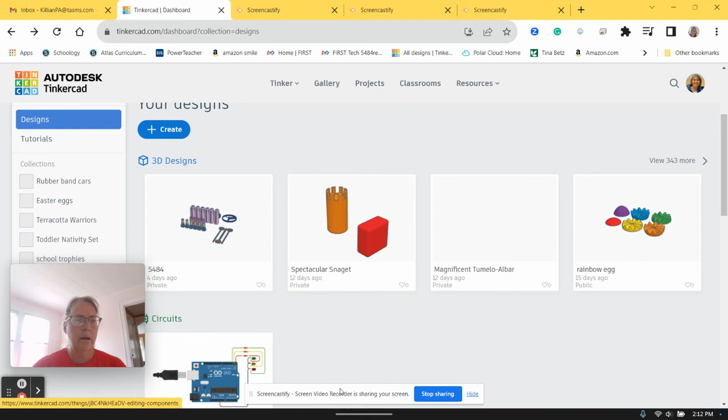Campers, we're going to work today to make a 3D pumpkin that you can then carve in Tinkercad.

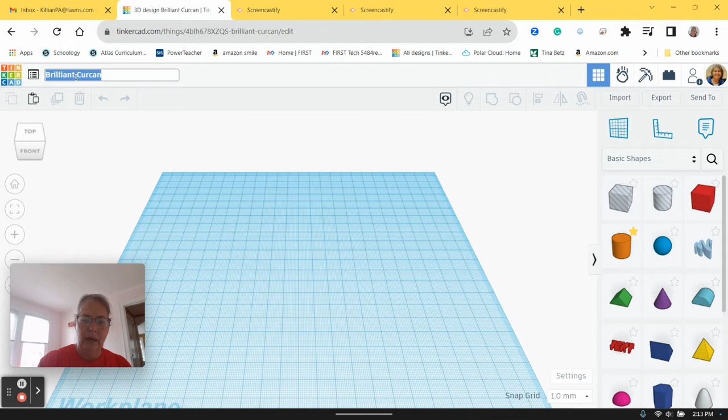So we're going to start by hitting create from your dashboard and a 3D design. This brings you to the work plane, which corresponds to the build plate of a 3D printer. Up in the corner, it's got some weird name that it just called itself. We're going to left click on that and then change the name to pumpkin, so I know what I'm dealing with here.

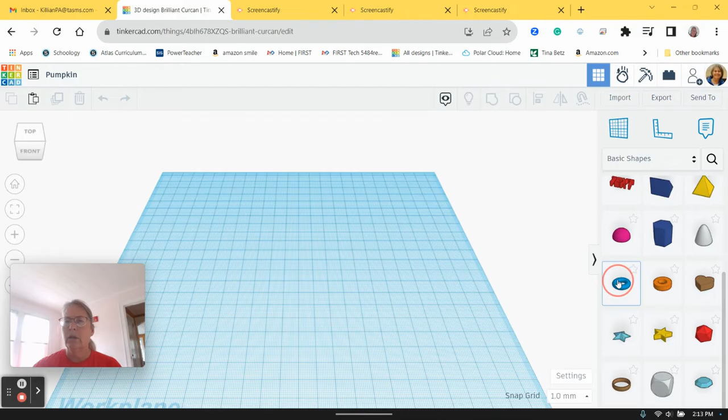All right, and then we're going to start putting shapes on our build plate. The first shape that we're going to pull in is our main shape. It's called a torus. In the basic shapes menu, you're going to scroll down until you see this blue one called a torus. You're going to left click and drag that onto your build plate.

Now, when you do that, it's going to give you some information about this torus. First of all, it says it's blue, solid. So we're going to click on that and change it to orange because of reasons related to it being a pumpkin.

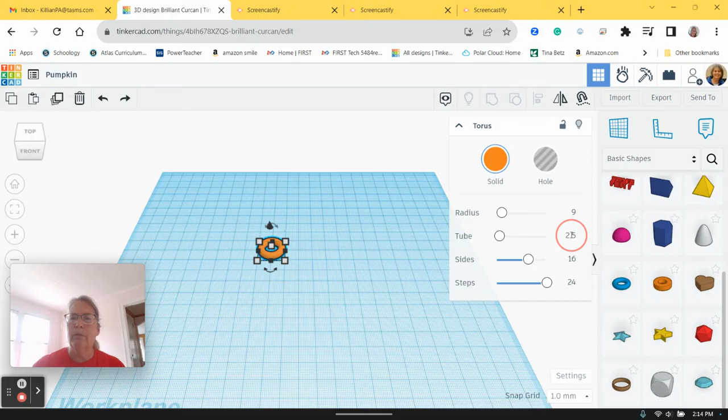And then we're going to change its size and shape a little bit. There's two ways to do this. One is to hit Shift and click on an edge and just drag it, that makes it larger, but I'm not really wanting to do it that way. I'm going to do it this way: I'm going to change this radius by clicking on this and changing this to, I'm going to make it 9. And then I'm going to change the tube to be 4.

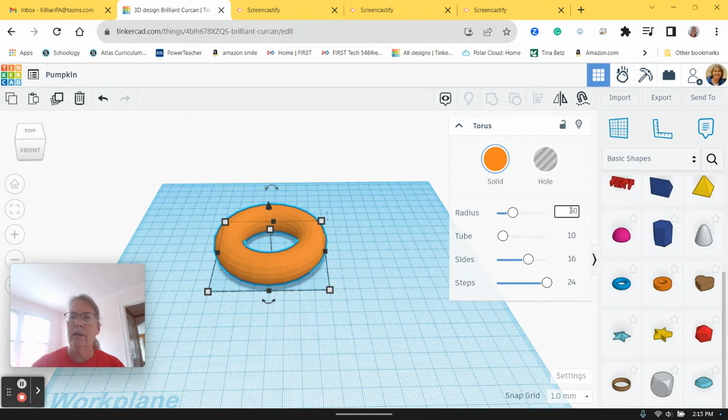Actually, I'm going to change this radius to be, I don't know, 30. And then I'm going to change this to be 10. That's about right. No, let's make it bigger. Let's make it 50 and 20. Oh, that's much better. That's a nice big, going to be a big fat pumpkin.

And then I'm going to change the sides. You'll notice that these things are kind of geometric, they've got like little ridges in it. I'm going to slide this over all the way to 24. That's going to make this shape a lot smoother.

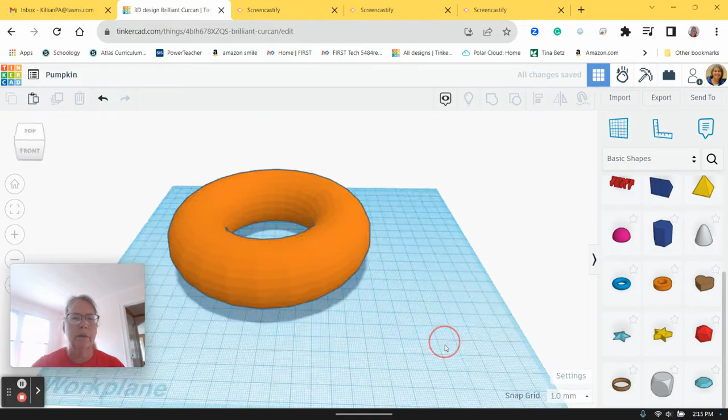Okay, now that I've got my first shape, doesn't look like a pumpkin yet, but trust me, it will. I want to left click somewhere on the build plate that's not on the torus and drag. Left click and drag, that's going to select that shape.

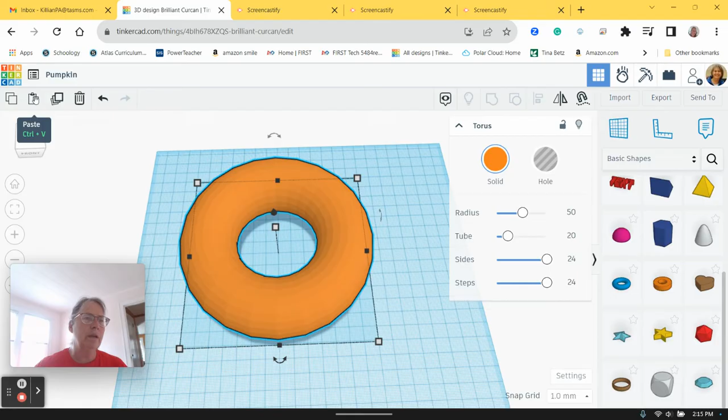Then I'm going to come up here to this copy button, hit copy, and then I'm going to hit paste. That's going to make another shape that's just like the one I just had, so that I have 2 of them.

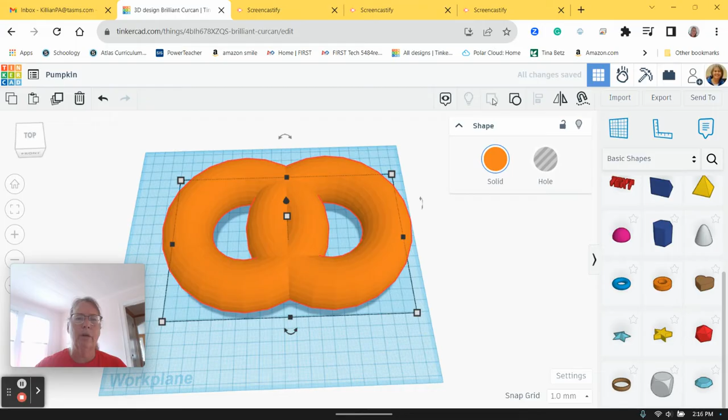Now I'm going to left click and drag so I select both shapes. And I'm going to come up here to this bar, which is called the group, and I'm going to hit that. Now what that did was put this shape as one piece. It moves as one now, it's like a solid glued together thing.

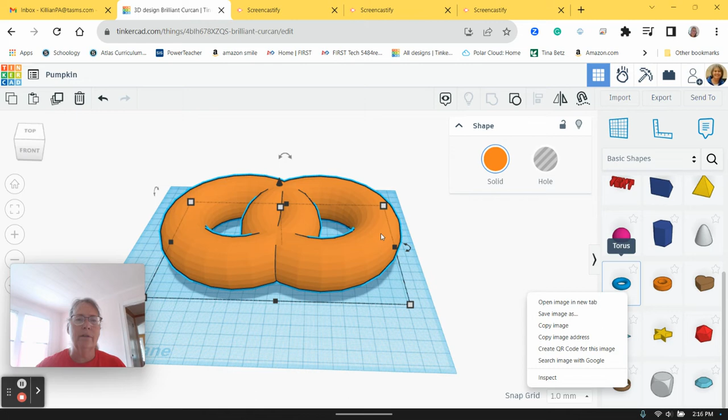Now, still doesn't look like a pumpkin, looks more like a pretzel. So now we're going to use these arrows. There are 3 arrows here, one that corresponds to left and right, side to side, and up and down. I'm going to go to this one here, and what I want to do is switch that 90 degrees.

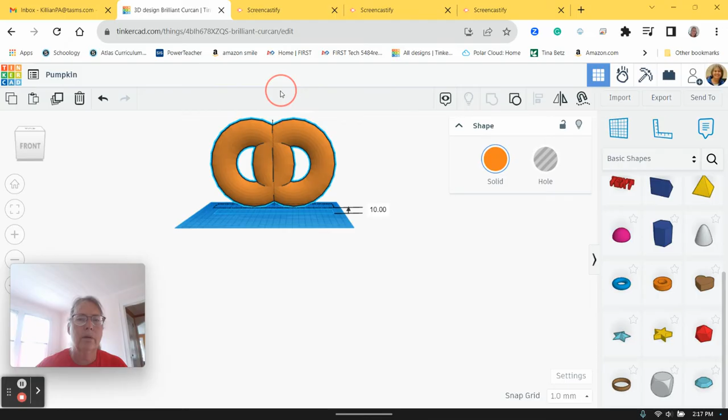Now you'll notice it's below the build plate, so I'm going to have to take this caret and move it up so that it's at 0. Well, here, I'll show you a different way to move it up. This says -18 right here. I can click on that and just hit 0. And now it just sits on the build plate.

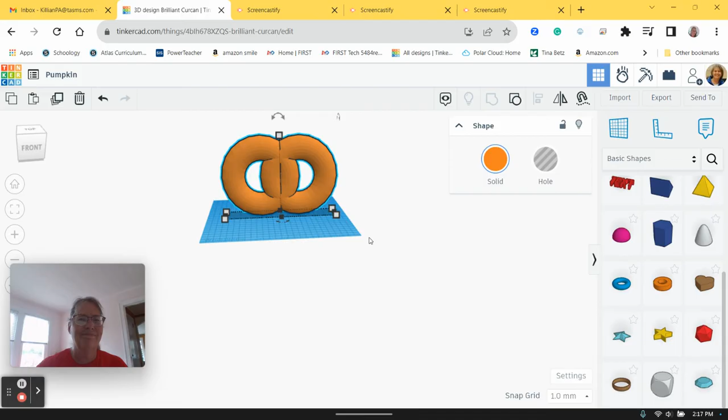Now it looks like a standing up pretzel. Still not what I really want, but I'm going to copy this whole thing now. Copy, and paste it. Now we're going to do something special.

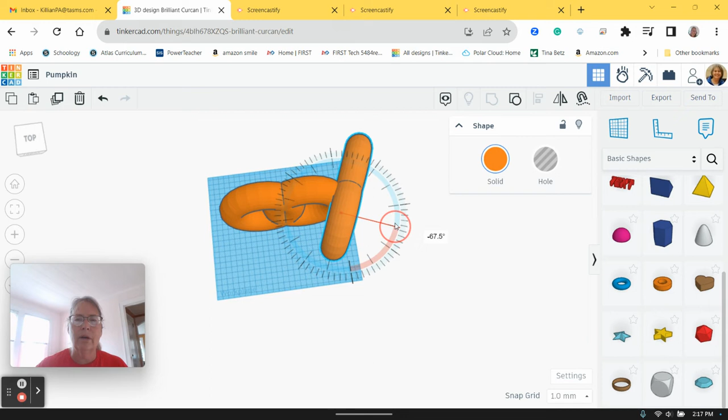Still using that arrow key, I'm going to turn this 45 degrees. You notice how I do that? I left click and hold, and it turns it. Actually, I'm going to turn it 90 degrees. Now it looks ridiculous, I don't know what it looks like.

But what we're going to do now is where the fun begins to happen. Select everything, left click and drag. Go back up here to this arrow or this taskbar and hit this one called align. We're going to align this in the middle. Notice the shape moving and align it to the middle there.

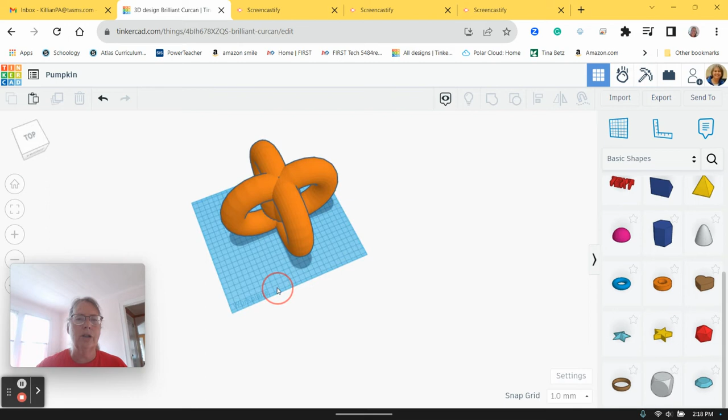Now it's starting to look like something, looks like a child's toy now, a baby's toy. Now we're going to select everything and glue that together. Once it's glued together, you're going to come up here and copy and paste.

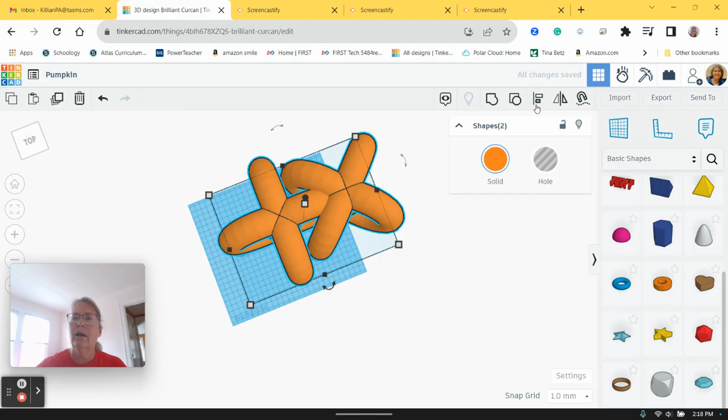Turn it 45 degrees. Align again. Now it's starting to look like a pumpkin.

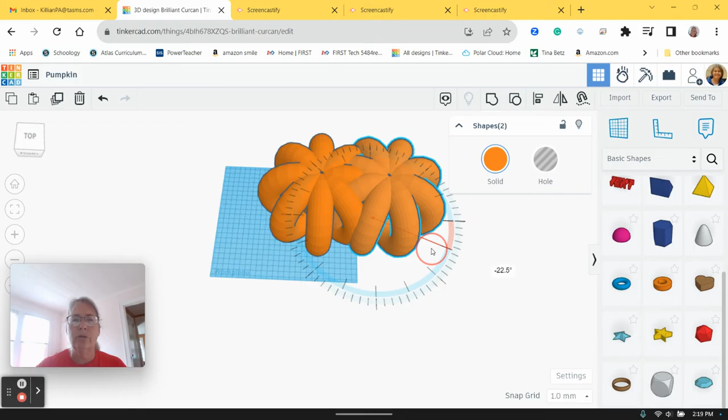Now I'm going to copy that whole shape and paste that whole shape. And I'm going to still turn it again, but now I'm only going to turn it like 22 degrees, 22 and a half degrees. Let's see how that works. We're going to align it.

Ooh, now it's starting to look like a pumpkin. We're going to glue that together.

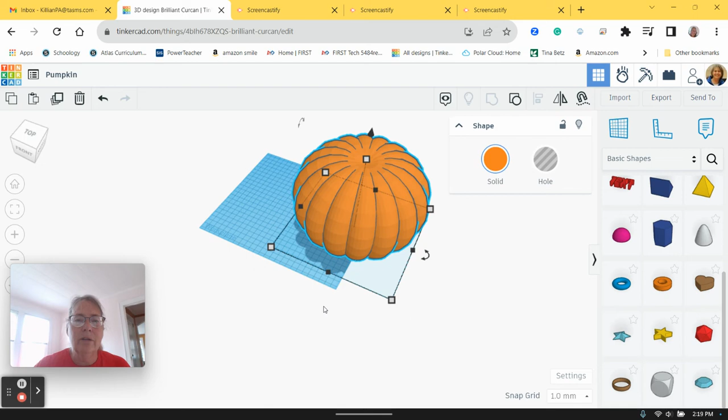Now at this point, if you look really close, if you've made your pumpkin big enough, it looks like a solid shape. But, hit this home again. But if I were to click on this shape and turn it into a hole, you'll see that in the middle, there's actually a hole in there.

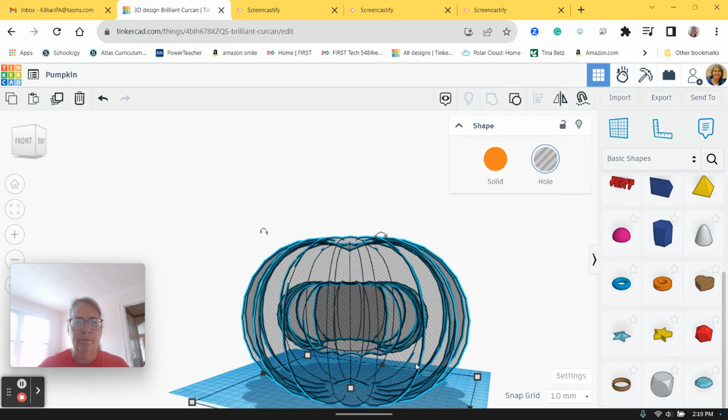Doesn't really matter because what we're going to do now is something that will save you a lot of work later. Go back and make this a solid. Oops. And now we're going to export this.

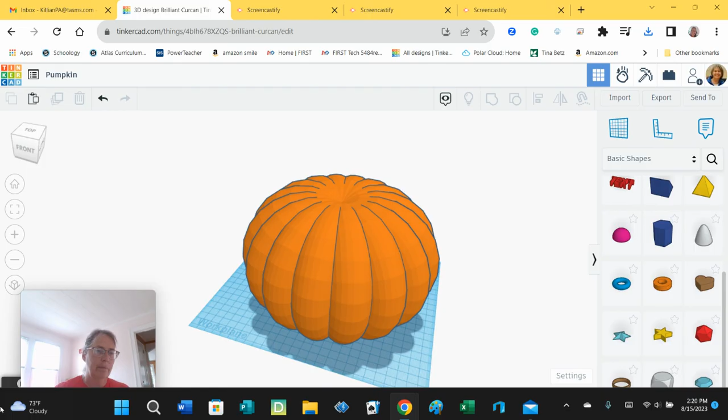And download it as an STL, and we're going to call it pumpkin. There's a reason for this: once this downloads, it's going to download and upload again as a solid shape. I'm going to stop it right there and come back for part 2.